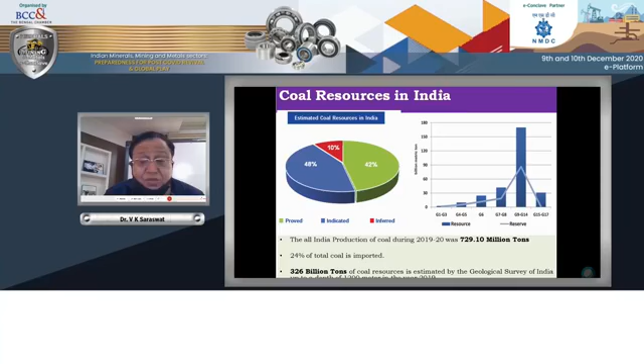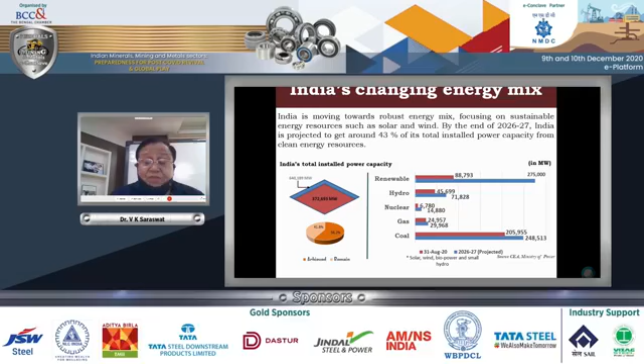Next, please. India is moving towards a robust energy mix, focusing on sustainable energy resources such as solar and wind. As Dr. Atanu Mukherjee mentioned, India has a goal of reaching about 450 gigawatts of renewable energy by about 2030. In the near future, 2022, we want to reach about 175 gigawatts, and we are well ahead of that trend. By about 2026-27, it is expected that about 43% of the total installed power capacity will come from clean energy sources.

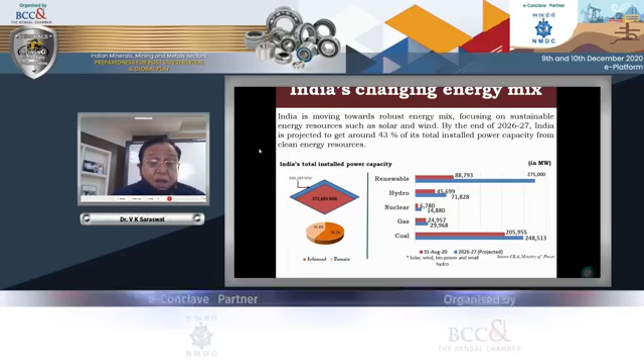The present installed capacity is in the region of 372 gigawatts. By 2026-27, we are likely to reach about 640 gigawatts. Renewables, today roughly 88 gigawatts, will go to 275. Hydro is about 45, which will go to 71 gigawatts. Nuclear, our numbers are low, 6.7; we expect to reach about 14.8 gigawatts. Coal is a significant installation today, 205 gigawatts, likely to go to about 248 gigawatts in the years to come. You can see the role of coal in India's energy mix.

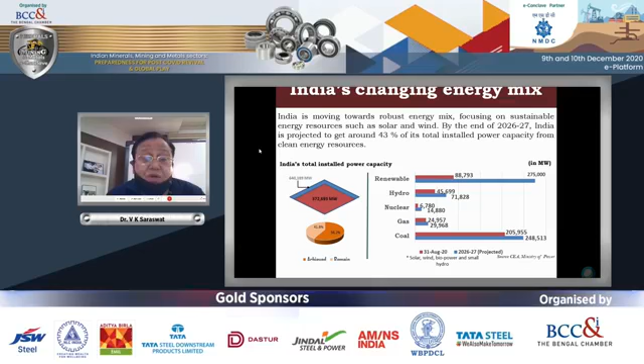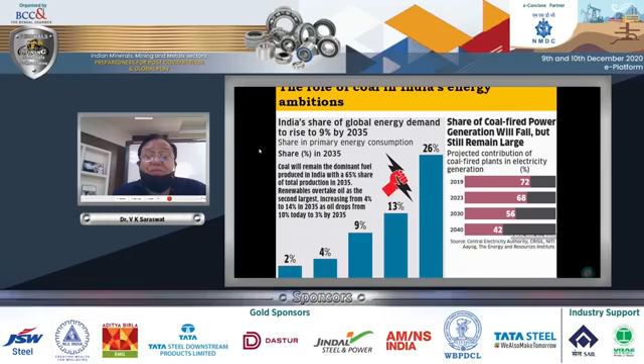Next, please. India's share of global energy demand will rise to 9% by about 2035, and its share in primary energy consumption in 2035 will be about 9%. But coal will remain the dominant fuel produced in India with about 65% share of total production in 2035. Renewables will overtake oil as the second largest, increasing from 4% to 14%. Oil drops from about 10% to 3% by 2035.

The share of coal-fired power generation will fall but still remain substantial, going from 72% today to as low as about 42% by about 2040. So there again, you will see that coal is becoming one of the major concerns.

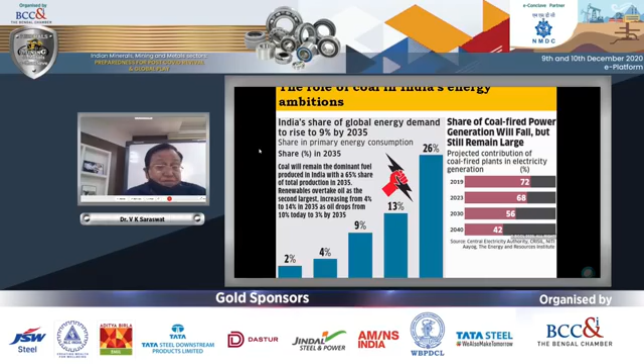If you see, the primary energy consumption will be dominated by coal, and these pillars will continue to dictate the situation in India's coal market. If you look at the snapshot, we are the fifth largest reserve, fourth largest producer of coal, second largest consumer, and also the second largest importer. Share in coal demand is 65% in power and about 15% in steel making.

Our CAGR outlook, if you look at the demand side, we are at 11-18, about 4.5%, expected to reach 3.5% by 2030, coming down. Domestic supplies will by and large remain the same. Imports will also come down from today's 7.8 CAGR to as low as 4.4%.

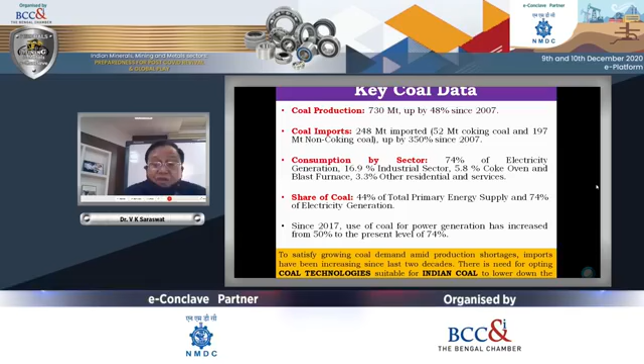So this is the scenario as far as coal is concerned. The coal data in hard numbers: we have 730 million tons, up about 48% since 2007. Coal imports about 248 million tons, out of which 52 million tons is coking coal, up about 350% since 2007. Consumption by sector: 74% by electricity generation, 16.9% by industrial sector, 5.8% for coke oven. Share of coal is 44% of the total primary energy supply and 74% of total electricity generation.

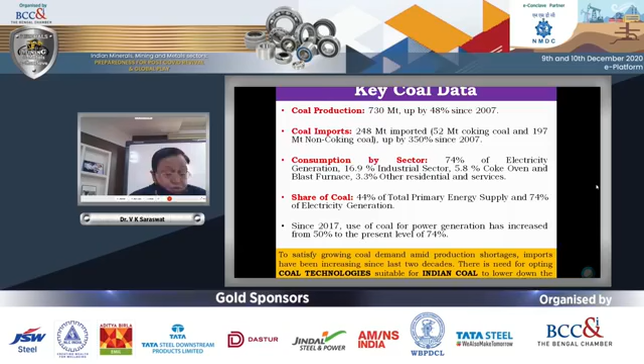To satisfy the growing coal demand amid production shortages, imports have been increasing over the last two decades. There is need for adopting coal technologies suitable for Indian coal to lower down imports. That is our major focus now.

We have a major commitment which we have made to the global international community. India's INDC targets for meeting climate change commitments are: emissions have to be reduced by about 33 to 35% from 2005 levels by 2030. 40% of total power capacity to come from non-fossil fuel-based energy sources, and a carbon sink of about 2.5 to 3.0 billion tons of CO2 through additional forest by 2030. This is the commitment we made in COP21, and India is well committed towards these objectives. Coal and renewable energy will play a major role.

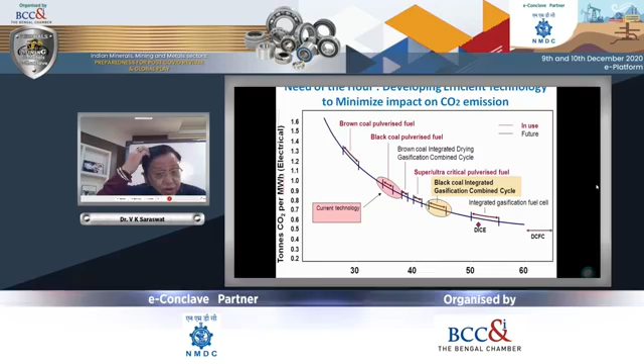In that context, this graph shows the contribution of various sources as far as carbon dioxide emissions are concerned. So our focus is on developing efficient technologies to minimize the impact on CO2 emissions.

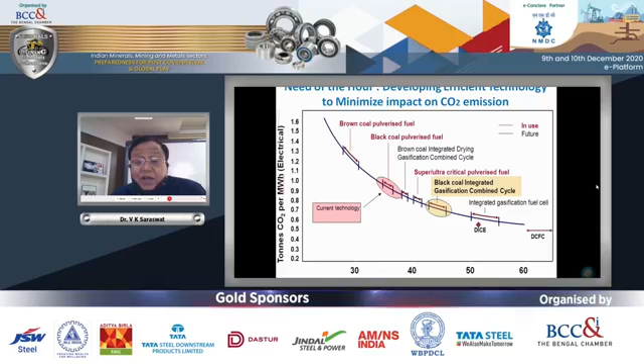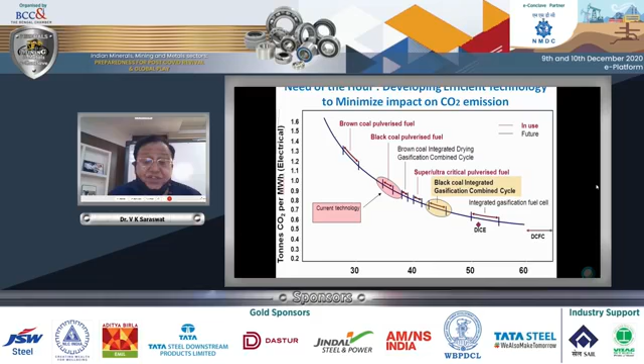If you look at it, the only answer we find is to resort to clean coal technologies. Clean coal technologies include clean processing, clean conversion technologies, combustion and power generation technologies, emission control, and waste recycling technologies—all forming part of our clean coal technology endeavor.

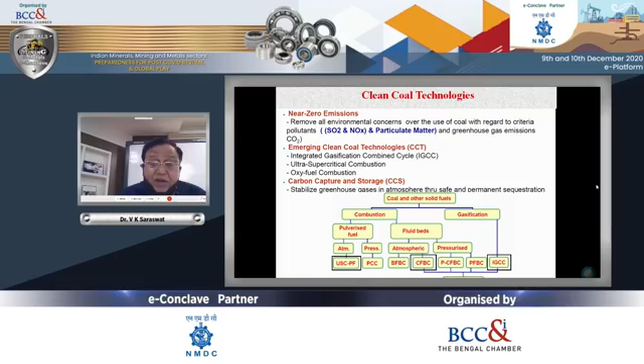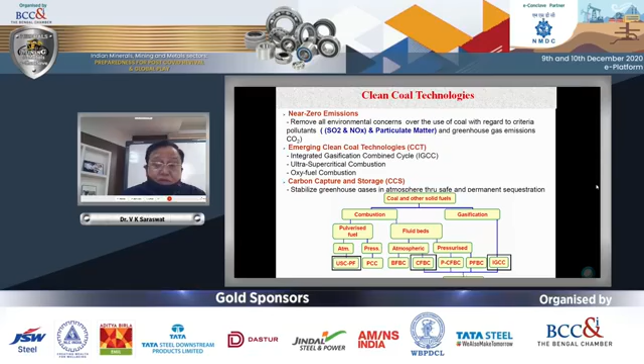What is this clean coal technology we are talking of? We are talking of technologies with near zero emissions, where all environmental concerns over the use of coal with regard to criteria pollutants like sulfur dioxide, NOx, particulate matter, and greenhouse gas emissions have to be reduced. We have emerging CCTs like integrated gasification combined cycles, ultra supercritical combustion, and in fact we are also working in India on advanced ultra supercritical, operating at almost 740 to 760 degrees Celsius. Oxy-fuel combustion, carbon capture and utilization are some of the areas, both where coal is used for combustion or gasification. In combustion, we are switching to efficient technologies like advanced supercritical, and in gasification, we are looking at IGCC and other hybrid cycles.

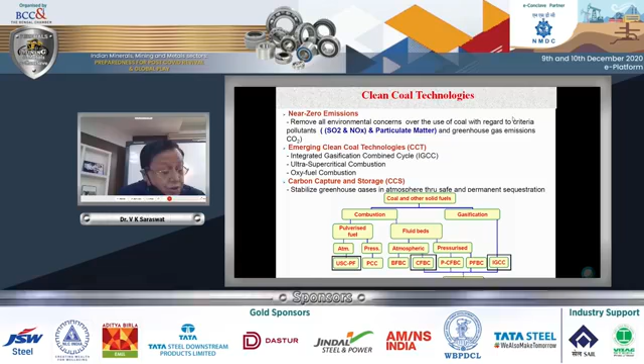So all the steps in clean coal technologies, right from coal preparation to coal beneficiation, coal blending, coal liquefaction, underground coal gasification—these are some of the areas being explored today.

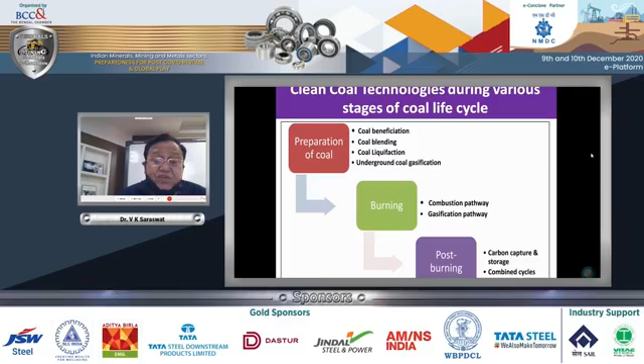Burning of coal in boilers and other places involves various combustion pathways where you can reduce CO2 emissions, and gasification pathways which follow a more environmentally friendly route, or post-burning exercises like carbon capture, storage and utilization, or combined cycles. These are the various areas in which work in this country is presently being undertaken.

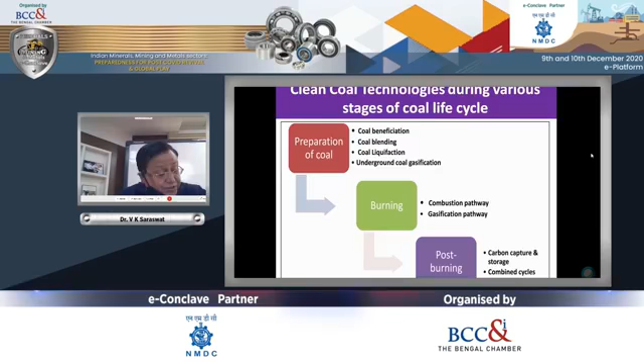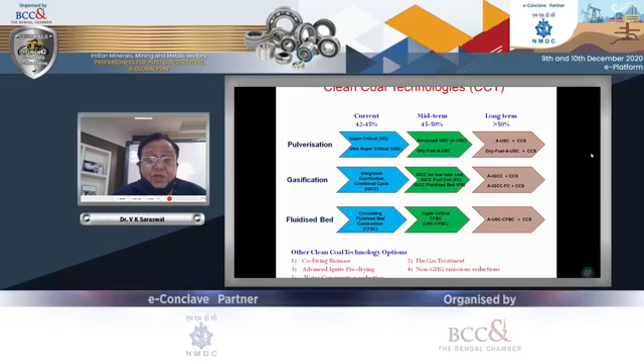Our present status is that we are currently at an efficiency of about 42 to 45%, with both pulverization and gasification, working with supercritical and then switching over to ultra supercritical. Mid-term, when we move to advanced ultra supercritical and oxy-fuel combustion, we will have about 45 to 50%, and long-term we are likely to get more than 50%. This is the clean coal technology scenario as far as we are concerned.

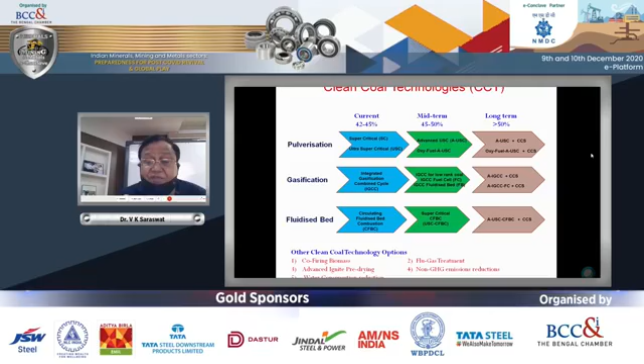For gasification, we go for integrated gasification combined cycle, along with fuel cell technologies and other fluidized bed kinds of gasification cycles. Most importantly, this entire thing will be integrated with carbon capture, sequestration, and utilization technology, ensuring a fairly low carbon footprint when we use coal. That is the scenario we are working on.

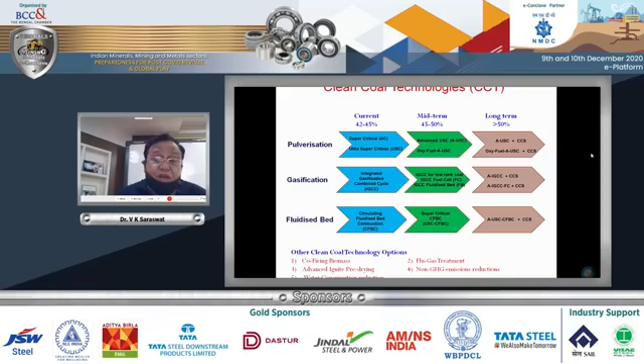Coal gasification is part of the creation of syngas, used for a variety of applications, starting from fertilizers, steel, chemical, refinery, creating new fuel, petrochemicals, and so on. This is one area of great importance for us.

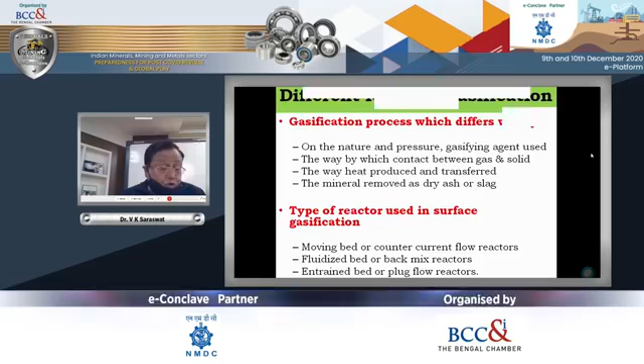The coal gasification process differs widely based on the nature and pressure, the gasifying agent used, the way contact between gas and solid is made, the way heat is produced and transferred, and the minerals removed as dry ash or slag. This is very important for our coals because we have high ash content coal in our scenario.

There are various types of reactors most of you know: moving bed, fluidized bed, combined fluidized bed, and entrained bed, a variety of technologies already in the literature and practiced by many countries. But what is suitable for India is the issue—whether it is fluidized bed for high ash content coal, entrained bed, or a plug flow reactor, these are issues which need answers. The international experience of various nations where such coals have been used will be of great importance and use to us.

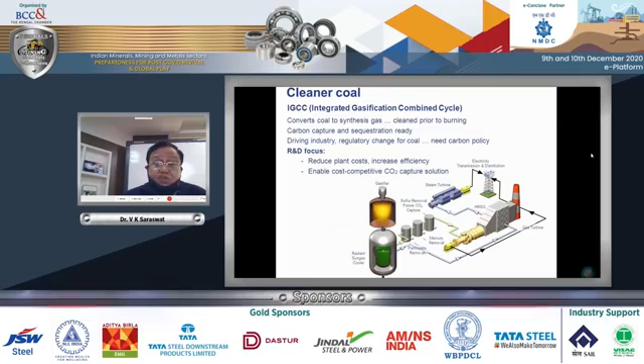This is a typical cleaner IGCC cycle which converts coal to synthesis gas, with carbon capture and sequestration. Our major R&D focus in this case is reducing the plant cost and increasing efficiency, and enabling cost competitive CO2 capture—that is the most important part.

If you look at the carbon capture scenario, based on a Japanese figure, you will see a method to increase the CO2 concentration of exhaust—the chemical absorption method, and the oxygen combustion method. These are the two methods.

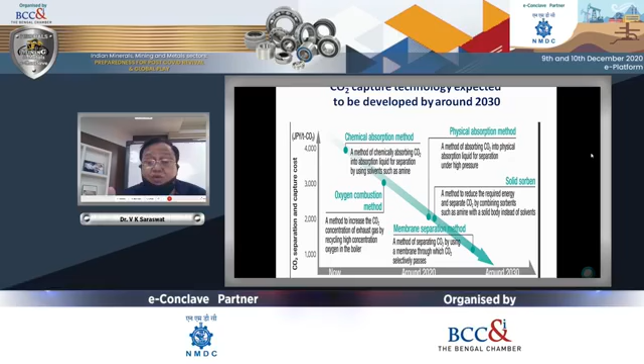Around 2020, there is the physical absorption method, absorbing CO2 into a physical absorption liquid for separation using high pressure. But ultimately we are going to have solid sorbent methods to reduce the required energy, separating CO2 by combining sorbents such as amines with a solid body instead of solvents. Finally, membrane-based systems, separating CO2 using membranes, will be the most cost-effective solution. Present methods are fairly costly even today, but as technology progresses, by 2030 we will have a significant drop in carbon capture and utilization technology costs.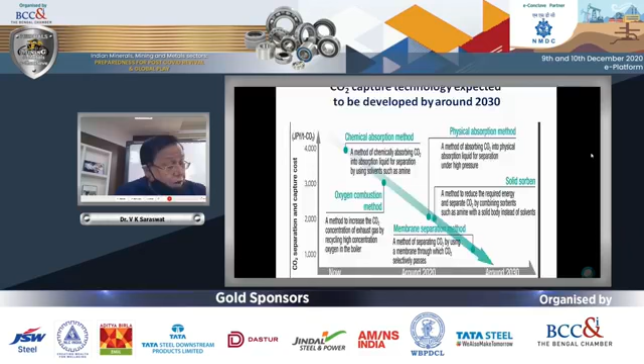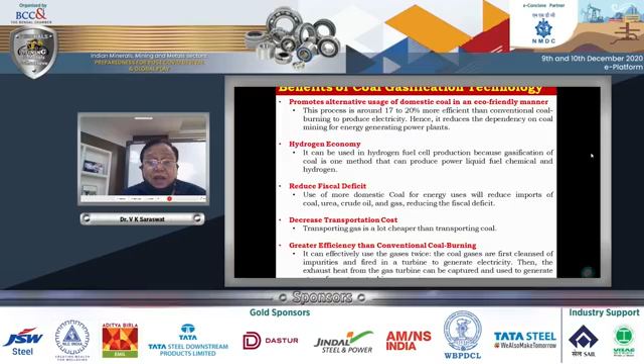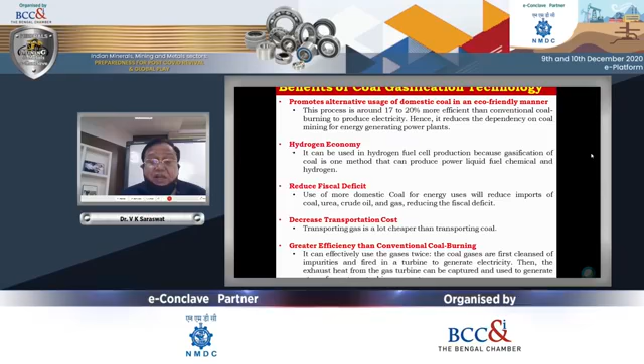The benefits of using domestic coal in an eco-friendly manner: this process is around 17 to 20% more efficient than conventional coal burning to produce electricity, hence it reduces dependency on coal mining for energy generation power plants. It can be used in the hydrogen economy—the previous speaker was talking about coal and hydrogen economy, they are combined. It can be used in hydrogen fuel cell production because gasification of coal can produce power, liquid fuel, chemical, and hydrogen. It also reduces fiscal deficit because imports will be reduced, and decreases transportation costs since transporting gas is cheaper—so we have to find better methods of transporting coal, with greater efficiency than conventional coal burning. That is the advantage.

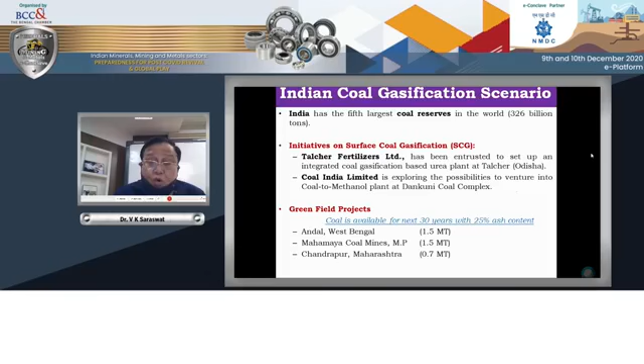Indian coal gasification scenario today has two major projects. One is the Talcher fertilizer project where we are gasifying high ash content coal by mixing it with petcoke using the entrained flow process, which has been used in China, and Air Products is a major technology provider. Coal India Limited is also exploring the possibility of venturing into a coal-to-methanol plant at the Dankuni coal complex. Then we have other coal fields also becoming active, like Andal, Mahamaya and Chandrapur. So there's a major program in India for coal gasification.

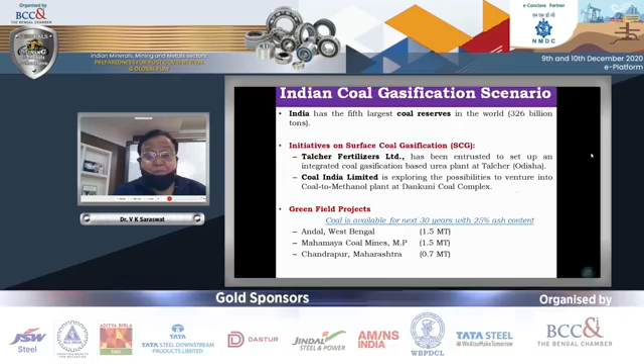India's coal is largely dominated, about 80%, by inferior quality coal found at depths of about 300 to 1200 meters, and 40 billion tons of lignite coal, most of which is found below 300 meters. These are found in various parts of the country.

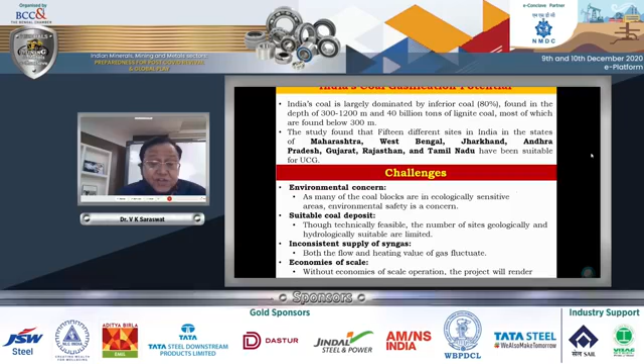The challenges include environmental concerns, as many coal blocks are in ecologically sensitive areas. Though technically feasible, the number of sites that are geologically and hydrologically suitable are limited. There's inconsistent supply of syngas, as both the flow and heating value of gas fluctuate. This is another major problem. And economies of scale - without economies of scale operation, the project will not be very viable. This is another challenge we have to face, so we have to go for larger and larger plants, but we also have to reduce the capital cost of setting up the plant if we want to be really economically competitive.

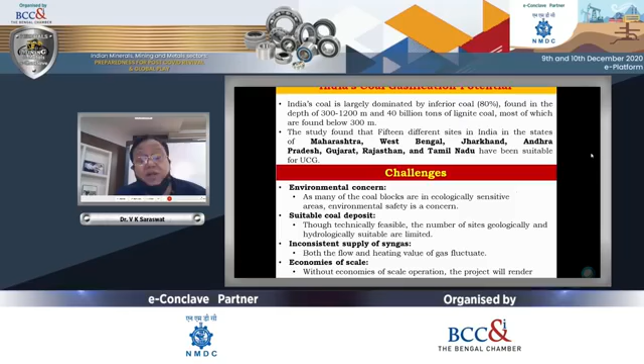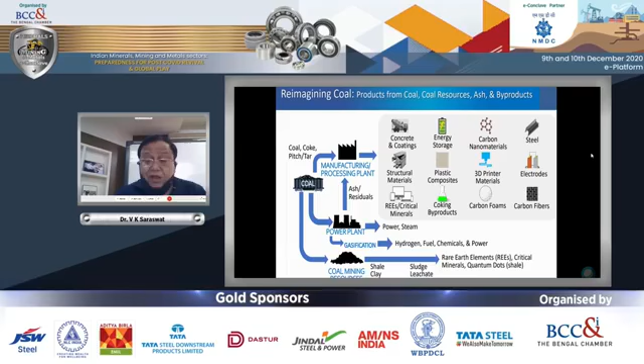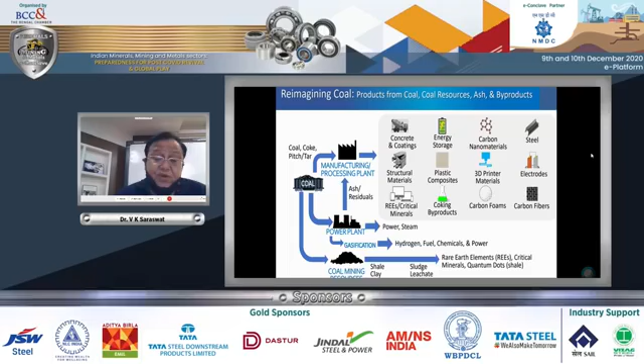This is reimagining coal, where not only for electricity generation, there's a lot of coal requirement for gasification in which hydrogen, fuel, and chemicals can be produced. Coal can be used for manufacturing a variety of other items like structural materials, critical minerals, coking byproducts, plastic composites, energy storage devices, carbon nanomaterials, carbon fibers, electrodes, and so on. Rare earth materials from the ash and other minerals like quantum dots from shale, and so on. This is what we call reimagining coal, not only for energy but for a variety of applications where coal can be made use of. This creates value-added product addition, and hence makes it more viable if you look at it as a total integrated coal refinery, as we call it.

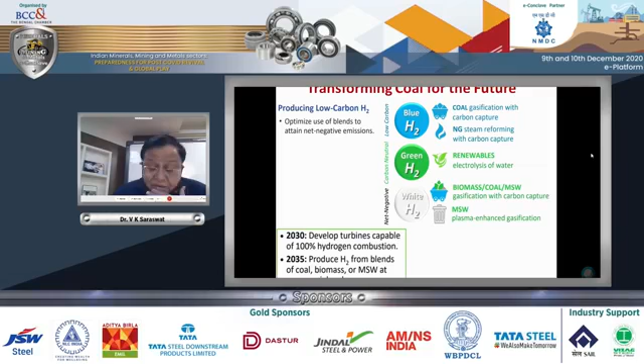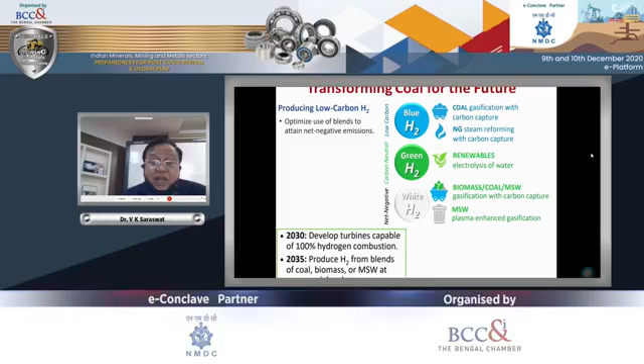There's production of low carbon hydrogen, optimized use and blends to attain net negative emissions. So coal gasification with carbon capture is blue hydrogen - today this is done by natural gas steam reforming with carbon capture. Green hydrogen is where renewables are used via electrolysis of water, and white hydrogen is where biomass, coal, MSW gasification is done with carbon capture. By 2030 we expect to develop turbines capable of 100% hydrogen combustion, and by 2035 produce hydrogen from blends of coal, biomass, and MSW at commercial scale, which will support the future hydrogen economy.

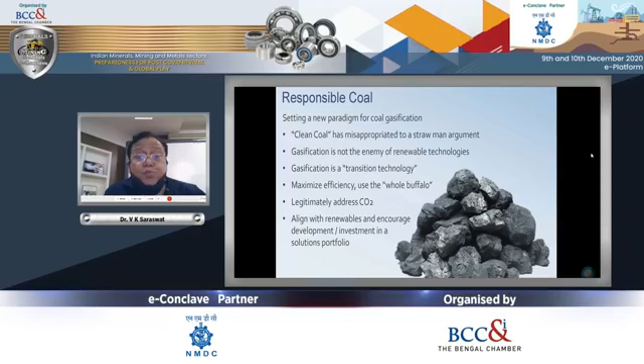A lot has been talked about regarding coal, and people have a lot of misconceptions about it. I'd say clean coal has been misappropriated into a straw man argument - we are beating each other's argument. There's no doubt that gasification is not the enemy of renewable technologies; it goes hand in glove with them. Gasification is a transition technology - maximize efficiency, use the whole buffalo, legitimately address CO2. That is what we have to do - align with renewables and encourage development investment in a solutions portfolio.

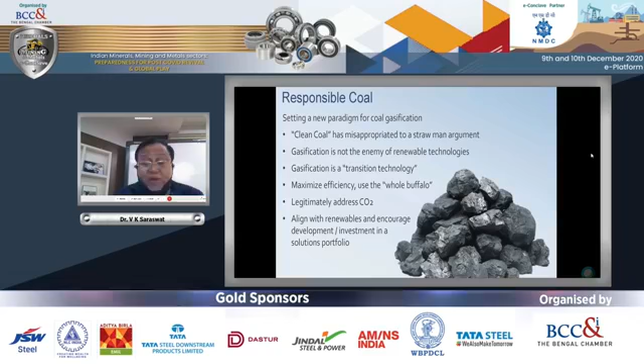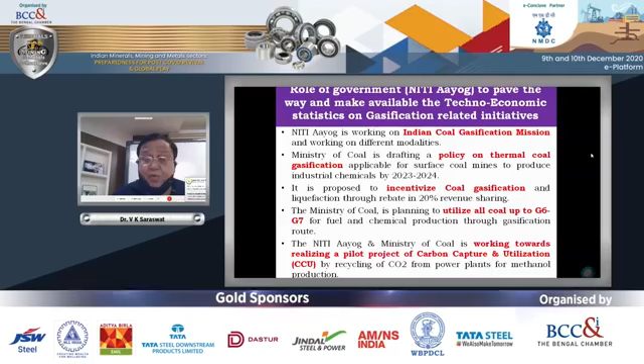So, the role of NITI Aayog: today the Indian coal gasification mission is being spearheaded through the Coal Ministry and NITI Aayog. The Ministry of Coal is drafting a policy on thermal coal gasification and incentivizing coal gasification and liquefaction through a rebate of 20% on revenue sharing. The Ministry of Coal is planning to utilize all coal up to G6 to G7 for fuel and chemical production through gasification. NITI Aayog and the Ministry of Coal are working towards realizing a pilot project of carbon capture and utilization by recycling CO2 from power plants for methanol production.

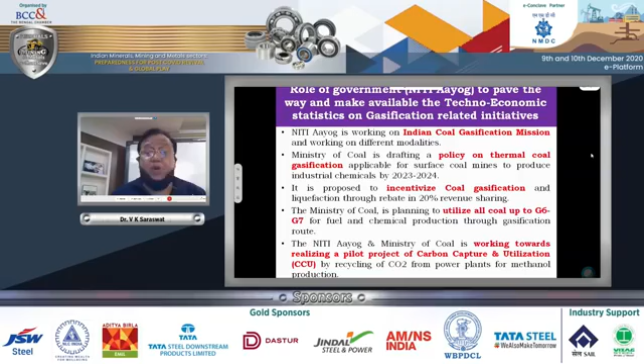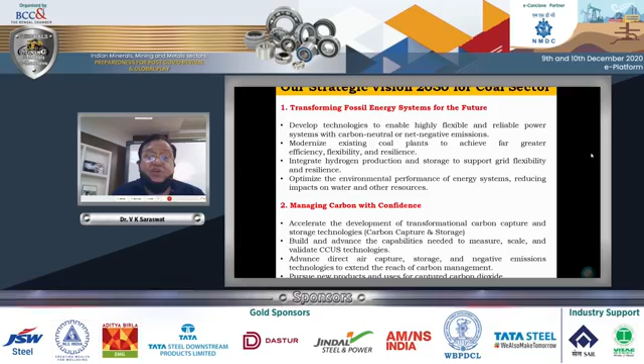Next, please. So this is the scenario, and we have a roadmap for our strategic vision for 2030, where we are transforming the fossil fuel energy system for the future: develop technologies to enable highly flexible and reliable power systems with carbon neutral or net negative emissions, and modernize the existing coal plants to achieve far greater efficiency, flexibility and resilience. This is another option we are doing. Integrate hydrogen production and storage to support grid flexibility and resilience. Optimize the environmental performance of energy systems, reducing impacts on water and other resources. Managing carbon with confidence. I already mentioned that there is an experimental method by which CCU is going to be our major focus.

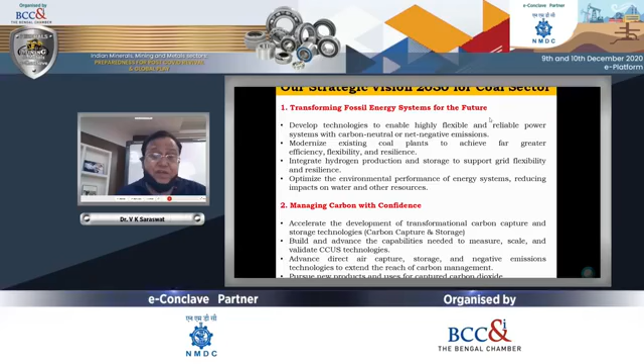Next slide, please. You have reimagining coal. So we are not only looking at coal for generation of power, we are looking at coal as a refinery for value-added products and coal-based resources across the economy, creating opportunity with analysis and engagement, and huge R&D in coal gasification, carbon capture and utilization, electrolysis, fuel cell technologies, all put together, and also the complete value chain from coal to chemicals, coal to fuel, coal to solid products, coal to carbon, and so on.

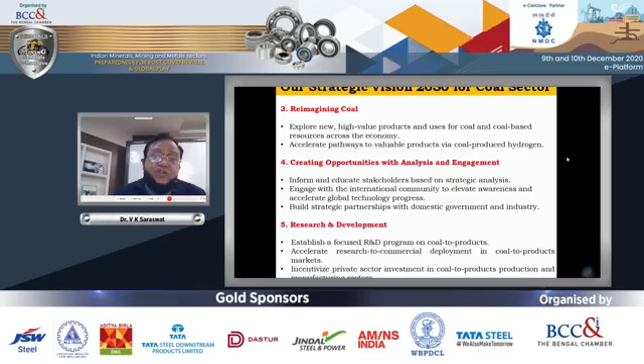So it's a complete island of coal gasification, which is what is being researched and worked out in India to ensure that we have a very, very cost-effective method of using coal, thereby reducing our import of fossil fuels for energy and reducing carbon dioxide emission.

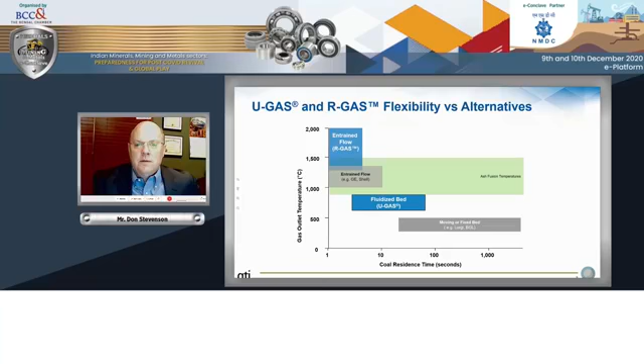The R-GAS entrained flow technology works at a much higher temperature than conventional entrained flow technology, so we're able to handle the very high ash fusion temperatures, well above 1500 degrees centigrade, and stay above the slagging limits for those normally difficult to gasify coals. And then our fluidized bed technology, which is U-GAS, has a much shorter residence time than typical moving or fixed bed gasifiers like Lurgi or BGL, and operates at a slightly higher outlet temperature. So it kind of fills that gap in between what's available now in the entrained flow and other conventional moving and fixed bed technologies.

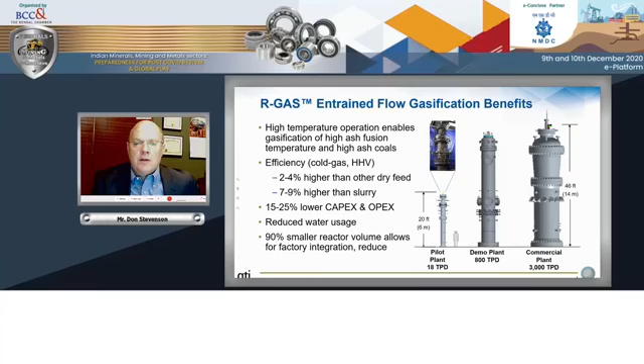The R-GAS technology is just now being scaled up to commercial readiness. We have a demonstration plant that's just been built, and it's undergoing commissioning in China at 800 tons per day. But we do have plans to take that up to 3,000 tons per day to offer it commercially. And the advantage here is technology that's lower cost, which Dr. Saraswat has mentioned is critical for achieving opportunities with IGCC and other applications. So it's really an opportunity to make lower capex as well as lower opex relative to other existing technologies. From an environmental perspective, also reduced water usage. And then last but not least, higher efficiency because of the high temperature and high mixing and high reaction kinetics that the injection technology creates.

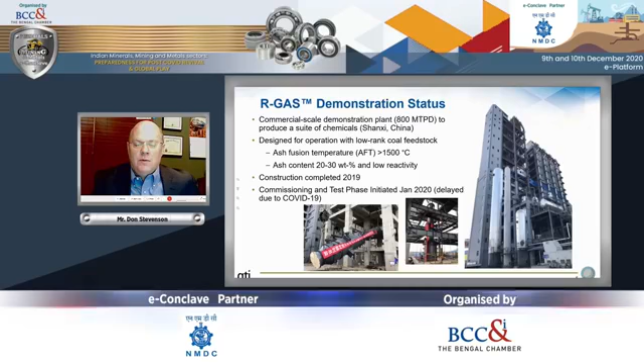And as I said, this is being demonstrated now in China. We've got this 800 ton per day demonstration plant built. It's undergoing commissioning. We did unfortunately suffer some delay here because of the COVID-19 outbreak, so we have not had our full team in China since February, but we're working creatively through that process and trying to get ready for full commissioning in the coming months, and hopefully we can get back into that and have that demonstrated with data here shortly next year.

The U-GAS technology, which has been commercialized now at commercial scale, both in Europe and in China, offers a lot of flexibility. We're looking at technologies that can provide proven capability for biomass and biomass coal blends, particularly now in light of the interest in looking for net negative solutions or at least net zero emission solutions. This is quite intriguing. And for very low rank coals, high ash coals, this is a suitable option and we think preferable to technologies such as BGL, since this offers no tars or oils in the syngas.

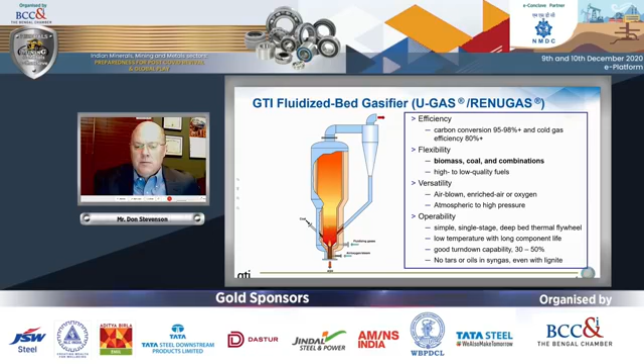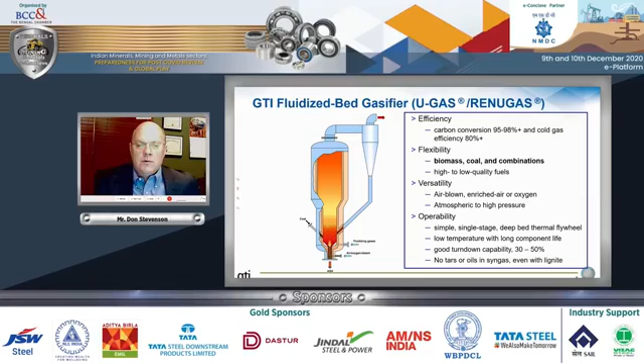So this technology had, I should mention, been licensed to a company called Synthesis Energy Systems. That group is no longer a viable entity, and the license has now been revoked, and so the technology is being offered by GTI for distribution around the world. This technology, as I said, has been commercialized. It goes back to 1975. It has been deployed for both complete biomass options in Europe, as well as multiple commercial scale plants in China for coal and low rank coals.

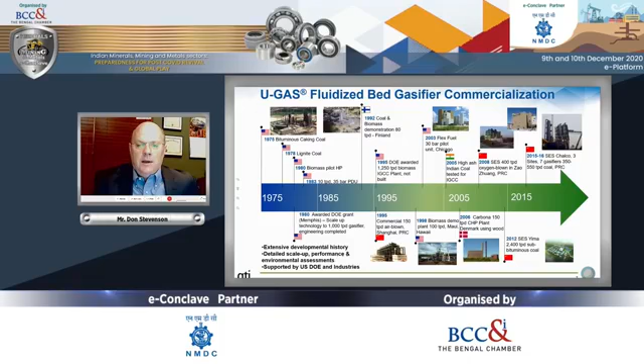Two projects I just wanted to highlight real quickly that we were just awarded with partners here in the United States, and in keeping with the projects that Angelos had mentioned at the beginning of the session: the Wabash Valley Resources hydrogen production project, taking the existing IGCC plant in Wabash Valley and repurposing it to produce hydrogen from petcoke and biomass. With 12% biomass blended with petcoke, they're able to achieve zero CO2 emissions, so basically net zero. If we increase the biomass blend, we actually then get net negative.

That includes CO2 capture at a nearby CO2 sequestration site. And it's very compelling, looking at potentially hydrogen production costs less than $1 per kilogram. So this is a significant project now getting underway to do the front-end engineering. And we'll see, I think, this get deployed very quickly since we're leveraging substantial existing assets that are already in place.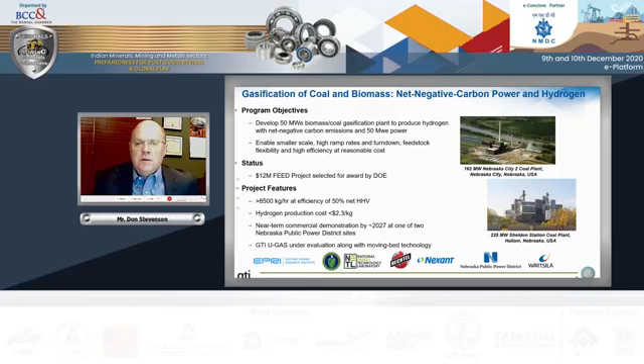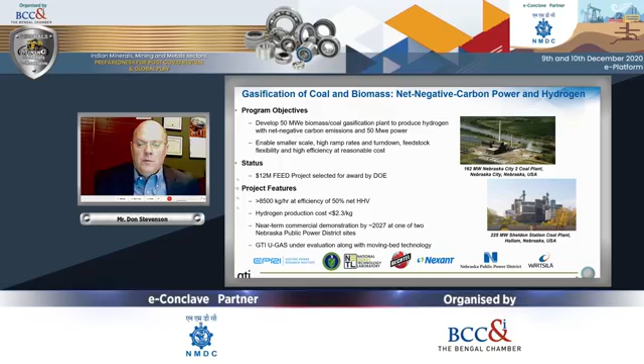And the second project, which GTI is also supporting, is with our gasification technology, UGAS that I just mentioned. It is a net negative carbon power and hydrogen project similar to the Wabash Valley, but this would be a new system, slightly smaller, looking at 50 megawatt electric biomass and coal, net negative emissions. This is also a FEED, front-end engineering design project looking at 2 different sites in Nebraska. And they're anticipating also pretty low net hydrogen production costs of around $2 per kilogram.

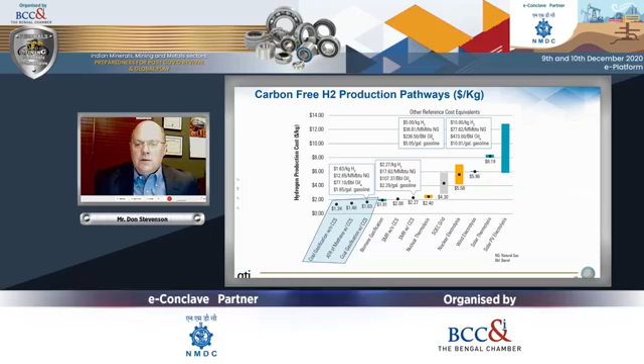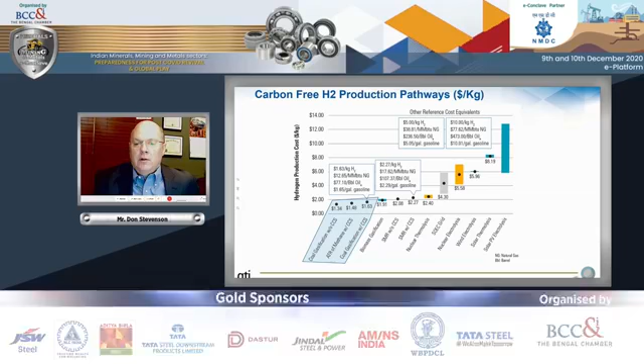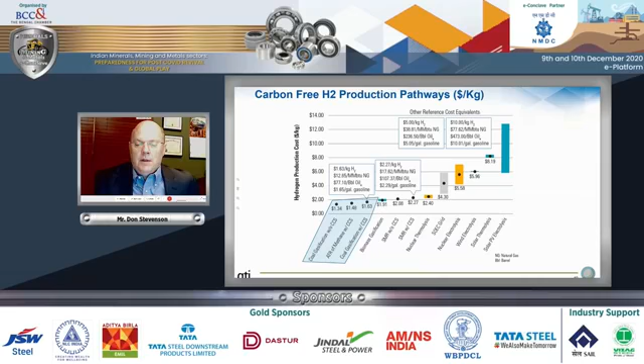And as Angelos noted, we look at all the different potential sources for hydrogen. I think this is quite intriguing now when we look at the significant increase in interest in clean hydrogen for various applications and markets. Renewables are on the right, just very expensive still. Yes, the cost is coming down. There's significant investment going into that area, but it's highly challenged to get down to the numbers that are competitive economically with current hydrogen production coming from natural gas reforming. But if you look at the lower left, coal gasification with carbon capture, looking at somewhere in the neighborhood of $1.60 per kilogram, very, very attractive, and we think will be a growing area of interest as we go forward.

So anyway, we have, I think, some interesting technologies that we can provide here for various different applications, particularly with high ash fusion temperature coals with the entrained flow technology we're now deploying, as well as the low rank high ash coals like in India with UGAS, and perhaps a combination of the two, looking at applications with biomass and waste blending to achieve low, zero, or even net negative carbon emission hydrogen.

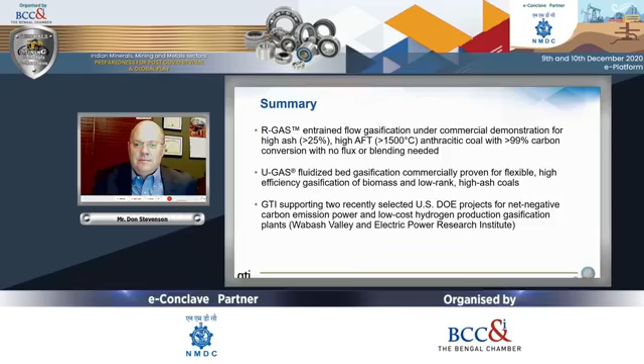Thank you, Don. Don, I think Dr. Saraswat and Angelos, all of us talked about the whole need for carbon dioxide capture and the use of carbon dioxide captured for converting into products, or for the purpose of storage, sequestration, or something called EOR. Vello has been running ARI for quite some time, and he's an expert in the area of how to use carbon dioxide for enhanced oil recovery. That may be particularly relevant in the Indian context in terms of getting more oil out of aging oil fields using CO2 in a carbon negative manner, if you will. So Vello, we've got a few minutes, and I know we are running short on time so that we can leave some time for questions. So if you can just help us with your presentation.

Well, you're not audible. Hello? Hello, hello? You're not audible. Do you unmute yourself? I'm on the phone. Okay, there you go. Can you hear me? Yes. Oh, good. All right. Can you hear me through my mic? Yes. All right. So let me go on to the next slide.

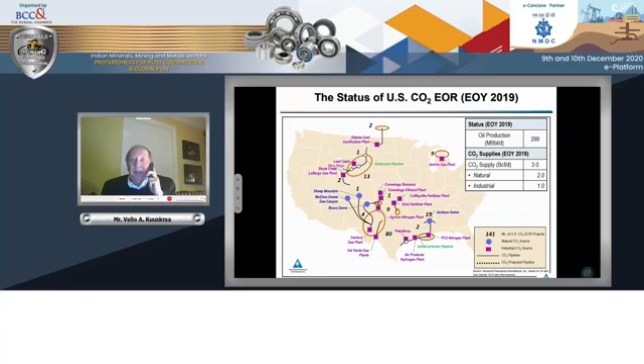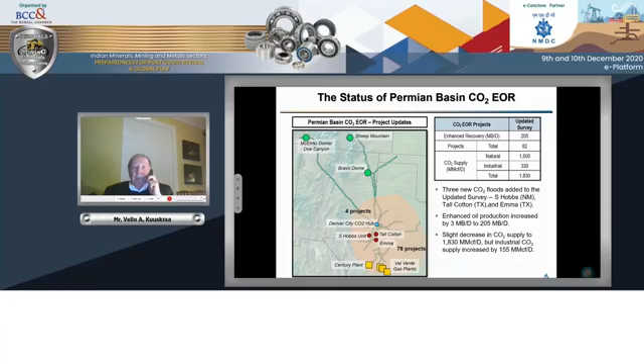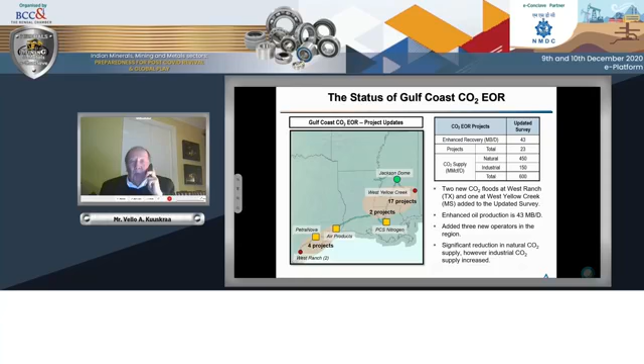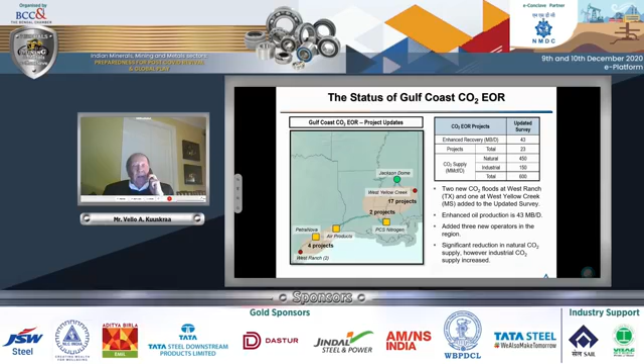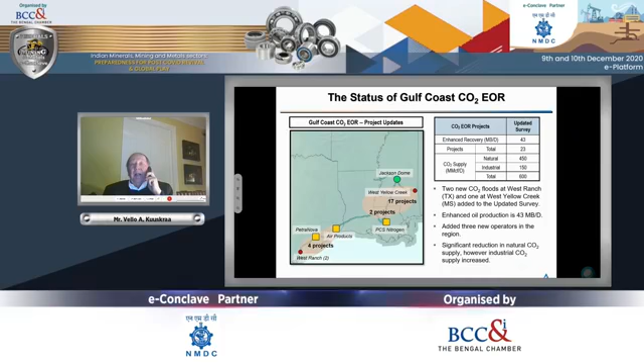I do want to point out the project along the Gulf Coast, and what's really important here is the pipelines have continued to expand. First down from Louisiana to the southern Gulf Coast, and then over into Texas as well, and ultimately beginning to approach some of the really large East Texas oil fields. There's some great opportunities to expand this area, but it's kind of our second major area. And then next slide.

I do want to talk about Weyburn. We've been able to work with Encana and now Cenovus, of course, on the Weyburn project to basically bring up its efficiency and performance. And it is by far the largest EOR project in Canada. It's a massive field that holds over 1 billion barrels of oil.

They expect to recover over 200 million barrels of incremental oil. So that's beginning to push about 17% or so of the original oil in place. And that's what a good EOR project should be able to do. It injects about 2.4 million metric tons a year. And it expects to ultimately store about 40 million metric tons of CO2.

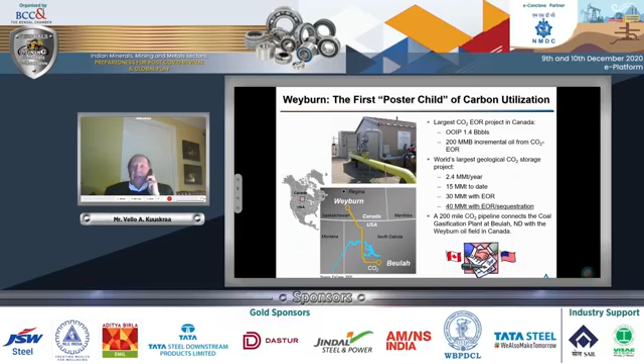There is a 200-mile, as I mentioned, CO2 pipeline that takes the CO2 from the coal gasification plant in Beulah, North Dakota, across the border into the Weyburn oil field. And since then, Canada has expanded its efforts. They built a large, what's called the Alberta Carbon Trunk Line.

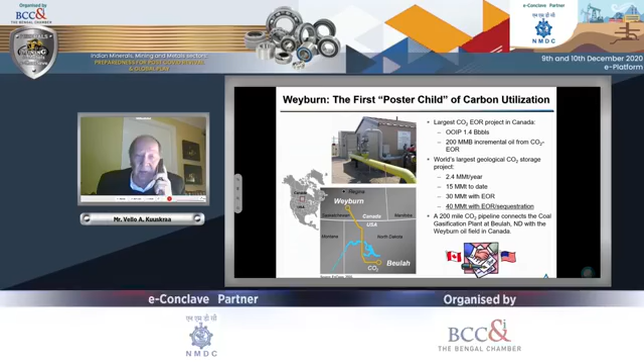There's the beginnings of a number of EOR projects in other countries. I'll be glad to answer those during my Q&A. In China, the beginning of projects in the Middle East, in Brazil, and a number of other countries. So I think I'll stop here, Atanu, and save some time for questions.

Fantastic. Thank you very much, Vello, for that wonderful introduction to EOR and the kind of work you've been doing in the US. Yeah, we certainly worked together on a couple of these projects, and I think it's very opportune for different countries where it's an opportunity to produce oil from aging oil fields, at the same time putting the CO2 into the ground.

Let's talk about a few questions, and some of the points that are raised by the distinguished panelists. I'd like to first take the question on hydrogen, and maybe Angelos, you may want to take this, and then probably Dr. Saraswat can follow up or chip in.

Certainly, yes, hydrogen is a very promising option in terms of fuel, in terms of feedstock, and it being clean is absolutely something which is very useful, by being able to take the CO2 out. The question I have is, if that is the case, how do you see hydrogen playing out in the world and in India? A lot of people have been talking about hydrogen for mobility, hydrogen for heavy transport.

It seems to me that for a country like India, replacement of baseload power with hydrogen-based turbines or syngas-based turbines initially would probably be more opportune rather than mobility. Given the nature of hydrogen, given the transportation issues that we may have, it looks to me that stationary applications at large scale seem to be more opportune. Angelos, do you have any comments on that?